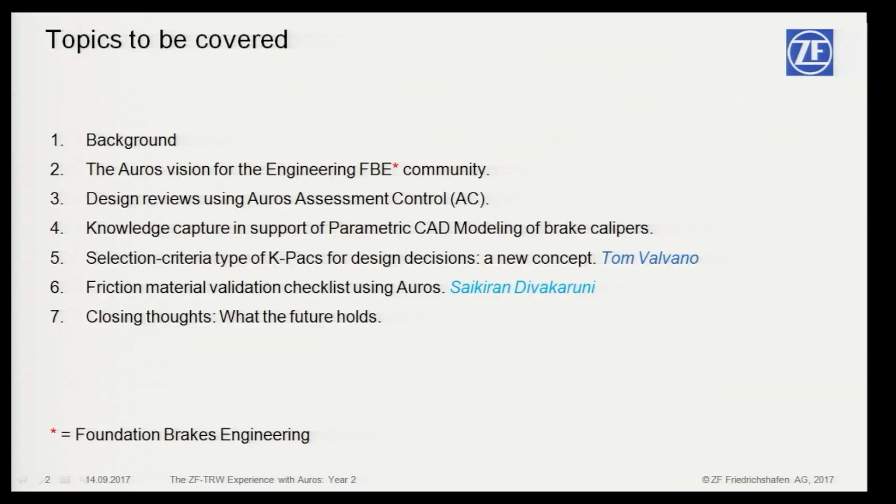A little bit of what we're going to cover today: we're going to give a quick background on what our company is, what Auros is in our work, and what our vision is for the Engineering FBE. We're going to see these 3 letters a lot — it means Foundation Brakes Engineering, which we're representing here.

Chris McCormick is our chief engineer. He's here again this year. He was here last year.

Number 3 will be design reviews in Auros, something I take a lot of pride in. I think we did a really good job over the past year. Number 4 would be knowledge capture using, in support of parametric modeling.

We're going to have 2 other presenters. Tom Valvano is going to show something really similar to what Tim presented in terms of knowledge enhanced decision making — really a decision making use of K-Pacs for the design engineer. There are points in the design where somebody needs to know which material to use, which feature to use. Tom is going to go into a little more detail on that.

We have Saikiran from our friction material team, who is going to go through his work in Auros, and we're going to have some closing remarks.

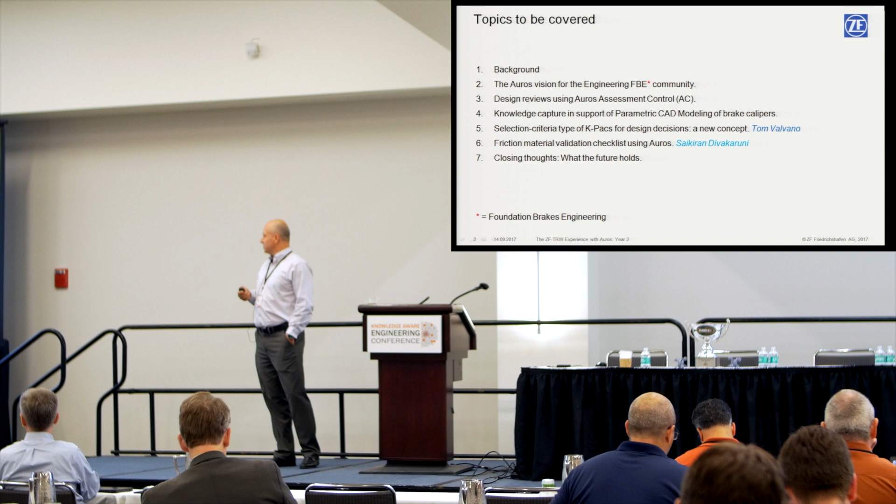First of all, I'd like to go through this slide quickly. I know Tom made fun of me for putting this in, but I wanted to find something interesting about the word knowledge, trying to find some etymology on it. Basically, it can be broken down into know and ledge. Know is more like know, perceive, recognize.

I really like the fact that it's opposed to opinion — it's something like it lacks opinion, it's really a fact. And the 'ledge' part is just action. So it's fair to say it's the process to seek truth.

We're throwing around another word, knowledge. We went through the information age where people said information is important, data is important. Now we have this other catchphrase that Jeff Moffat wants us to buy into, right Jeff? It's knowledge — knowledge is the most important thing you need to have. So it's important to actually know for your company what is not knowledge.

I think that's what we learned over these years. Some people want to put everything in Auros, but maybe there's already a better place for some of the pieces of data that we have out there. I really like the other word that describes knowledge, which is wisdom.

It's something like what you do, what you have in front of you. So you have a lot of information — let's say you want to bake a cake. You have the information, and with that information you apply your tacit learning, and you make something useful, something delicious in this case.

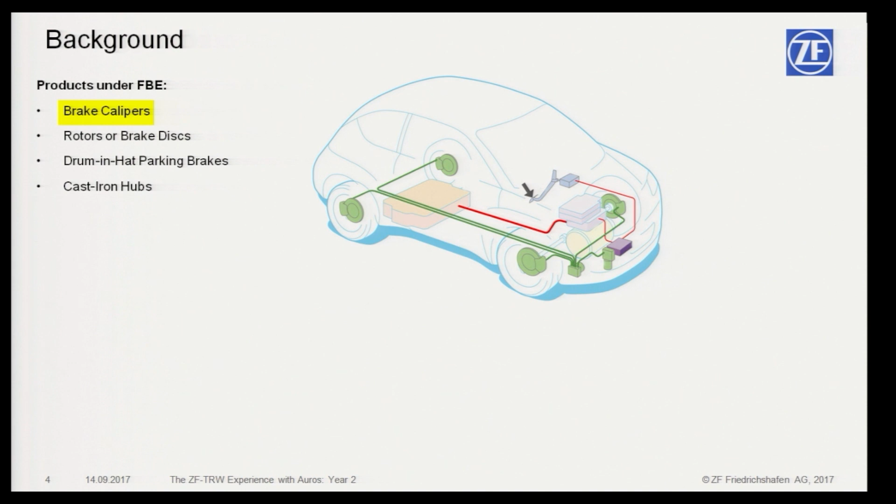Moving on, I just want to show quickly what kind of products we're talking about. We work with brake calipers, rotors or brake discs, parking brakes, and cast iron hubs. What we have here is basically 2 examples of the products we work on, some of the main ones.

One is the conventional caliper. What's shown here is a twin piston design caliper, mostly used on bigger cars and bigger trucks. We also have one example of our electric parking brake, or EPB — a product that's really taking off right now.

So what we have in Auros is mainly related at this point to this type of product. We do have some knowledge in the other 3 products we work on, but mainly what we've worked on for these past years has been on these 2 products, because they represent maybe 90 to 95% of what we do.

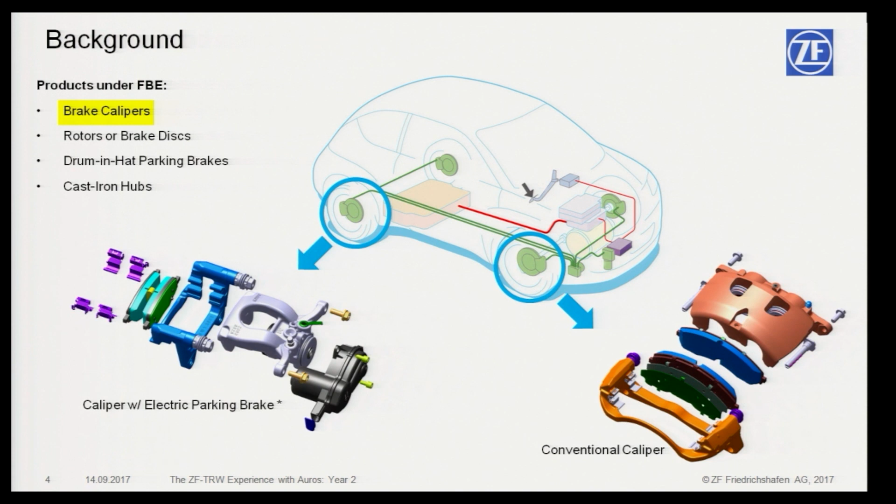So there's a lot of challenges when we're trying to go through knowledge capture applied to brakes. Once we're doing the brake design, one of the first things that we look at is to minimize brake drag. I don't intend this to be heavily an engineering discussion, but I just want to point out some of the challenges that we have in terms of knowledge capture. Brake drag is important to reduce or eliminate because it directly relates to fuel economy in your car.

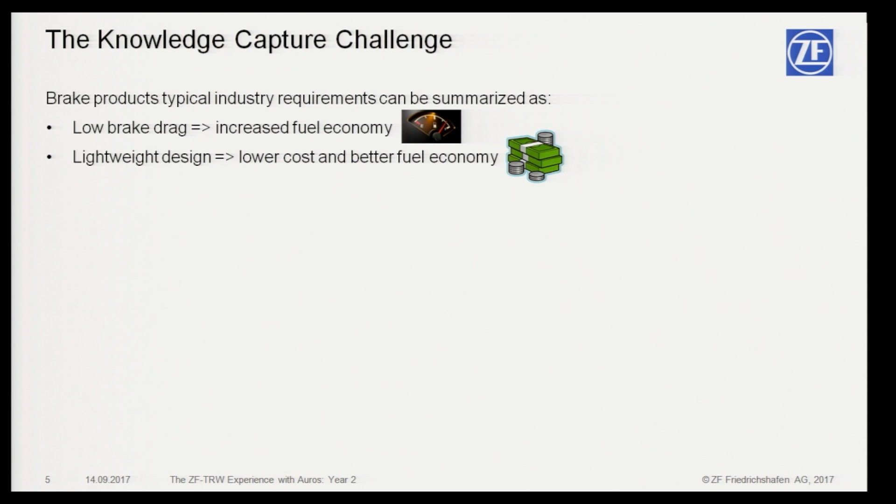The next one will be lightweight design. So we're trying to achieve the customer requirements at a lower cost and also with a reduced mass. Only enough mass, because that also translates to fuel economy in the car.

And we need to make sure things are not going to break, especially when it comes to brakes, right? So we need to make sure it's reliable and it has proper safety requirements met. And it has adequate stiffness. This is related to the pedal feel. Every time you're pressing your brake pedal, you don't want to put your foot all the way to the floor. You want to make sure you have responsive brakes.

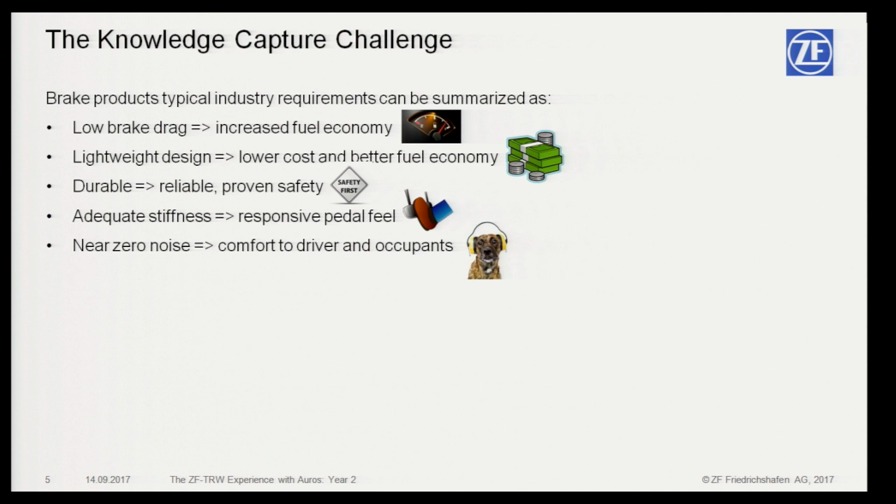And finally, we need to be near zero noise. I know we hear in movies a lot when the cars are braking, you hear that squeal. It's very characteristic. People don't like that. I mean, maybe they like it in movies, but it doesn't work well in real life. So we want to work to minimize that, to bring comfort to the driver and to the occupants, or to the dogs that are in the car.

So a good brake design is when everything is met on time and within a competitive cost. The real key for success here is when we accumulate knowledge of decades of engineers doing studies on their own, testing, calculations, and they come up with good solutions for all of those attributes. Obviously, in our test plan, we have a lot more than this, but I was just trying to summarize the main topics here. So what is key is to make sure we collect that knowledge in a structured way.

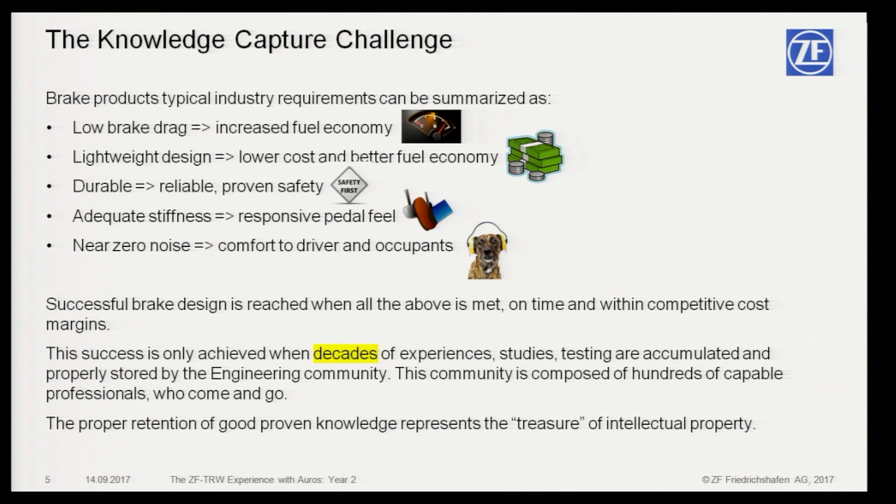So people come and go. That's another challenge that we have. Like I think Tim mentioned, we have good people, but oftentimes they have to move on. They have to move on with their careers or retire sometimes. So the main challenge here, or the treasure of intellectual property, is how to collect that information and apply it to everybody else. So if people can close that gap on the chart that Tim presented there, we can really tap into the experience of others.

And we experienced that firsthand this year, as you guys are going to see in our organization, when we're doing assessments for actual projects. That's when we saw that the standards that we use to design brakes are really, I shouldn't say not great, but they are really not up to speed to some of the things that all of the customers are using. So it allowed us to refine the knowledge, correct that knowledge, update it a lot more.

So last year, we trained most of our people in Auros. We had about 5 awareness sessions where about 80% of the people got into the training. Chris might remember that because I used a lot the character of the angry chief engineer on some of the illustrations for that training, to illustrate recurring errors and stuff. So don't get angry at me, Chris, please.

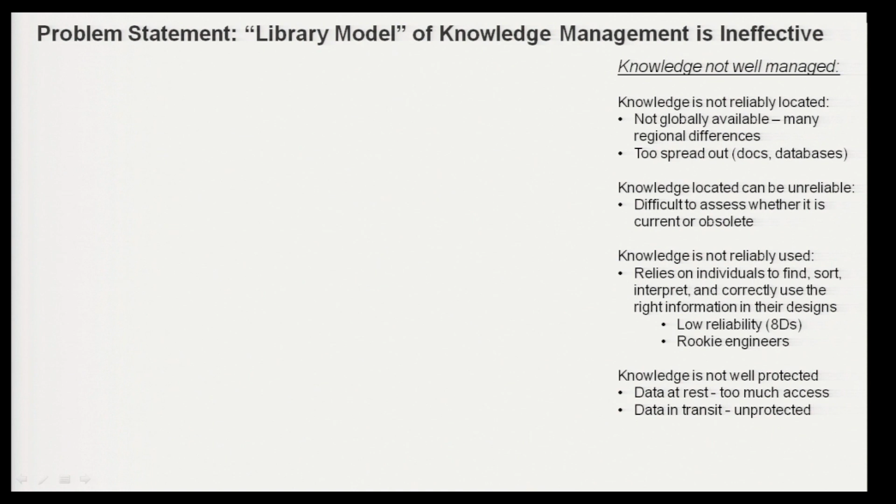So I don't think people are using it actively. The idea was great, and the information in those books is probably very good, but it's a perfect illustration of why a library model doesn't work. Maybe we can repurpose it now to have a new cafeteria or something.

So this is typically what it is - we have a product development process with several gates to go through, and we're expecting people to go to that library and search for information. There's a lot of problems with this. As Jeff mentioned yesterday, it's not efficient, and people have to spend a lot of time going through it. A lot of people don't even go look for information, so there's a lot of issues with that.

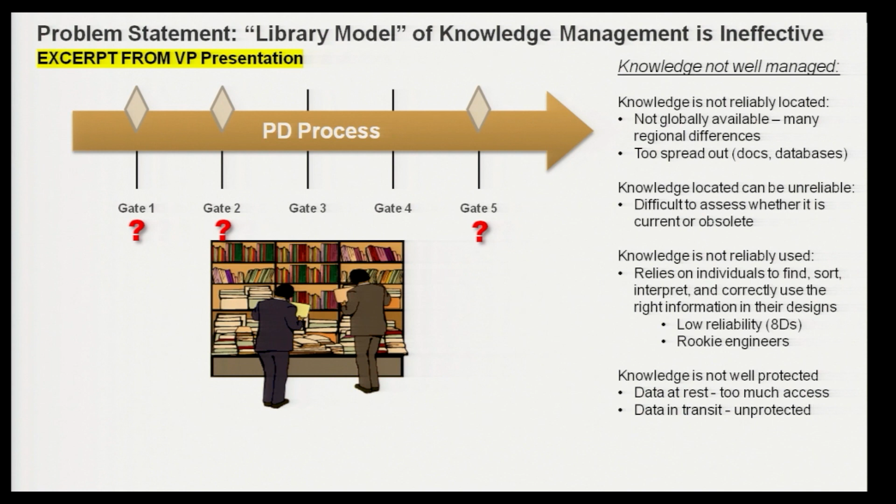So what Auros brings is a new way of doing things - combining all that information in terms of K-Pacs and assessments. We have a structured way to capture knowledge, and a structured way to deploy the knowledge on demand. We're going to see here some expressions of knowledge on demand - that is exactly what the previous presentation is all about.

It's knowledge in the flow of work, or KIT-F - maybe we can call it that, I'm just trying to create a new acronym here. So this is exactly what Auros is going to bring to our company.

So in terms of K-Pacs and assessment controls to structure this, I did a comparison between the conventional approach and the Auros approach.

The first question when you find a nugget of knowledge is: where is it? Sometimes the knowledge is very difficult to find, or not reliably located. Oh, I have it on this email, on the network drive, on my hard drive. It's really difficult to find, it's not globally available. With Auros, we have an easy and reliable location for this type of information.

The second question is, is it reliable? You find an email with a PowerPoint or a spec, but I don't know if it's the latest one, if it's being revised, or maybe somebody will say, oh no, I don't like that spec, I have a better one. So you're really unsure how to proceed in your design.

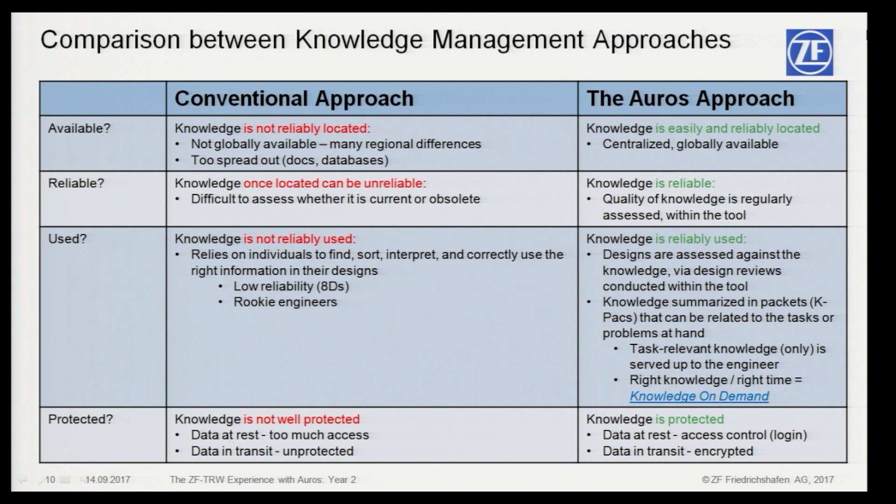The last question is, is it protected? For the conventional approach, the answer is straightforward - we really don't know where emails go once sent out. With Auros, we have the ability to protect information in two ways: access control through login information, and encryption of data in transit. So we have two levels of protection.

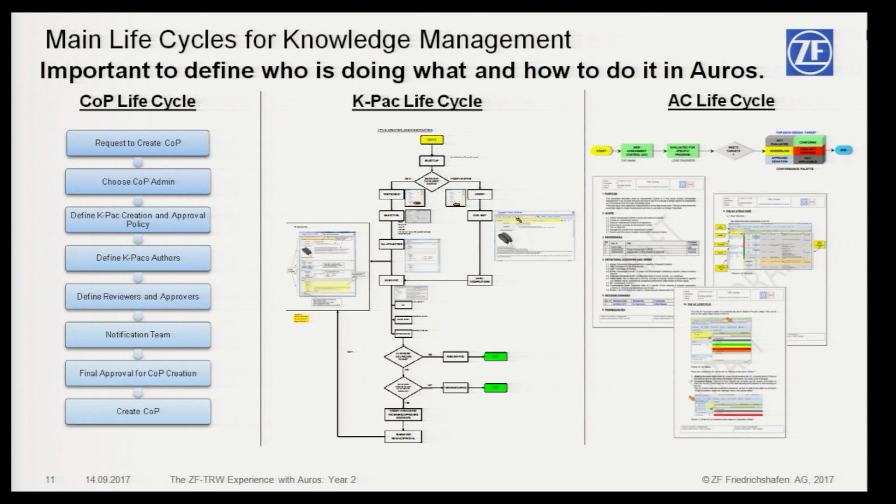Here are the main life cycles for knowledge management. I don't want to go through this in too much detail, but there are really three areas that people are looking at in terms of process in the system: the community of practice, the K-Pac creation and approval process, and the assessment.

The one thing we need to define a lot better now is to ask ourselves who's going to create, maintain, and approve every single piece of these three processes. That needs to be well defined, and we're still working on it, trying to get global agreement - it's really important.

We can have K-Pacs created but not being useful, or even worse, the information there is wrong. So we need to make sure all these K-Pacs and assessments are done, processed by the proper people, with a formal approval process for this stuff.

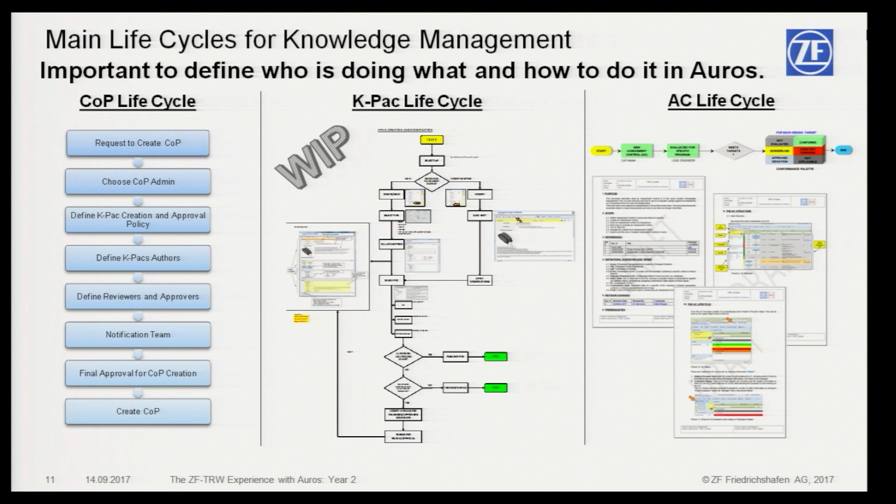In terms of design reviews, I have a couple of slides to illustrate what we're doing here. Why do we do design reviews? Because it's part of our development process - we need to make sure designs going out there meet the latest guidelines so we don't have mistakes happening.

Also, it enables design teams to bring attention to problems with the design, drawing management attention to specific applications. Let's say I have a caliper design but I'm not able to meet a specific requirement because of a packaging constraint or customer requirement - the design reviews are a tool to flag that as red.

So reds are not bad - some people say their project needs all greens, but reds allow people to focus on the right points, get the work done, and bring it to closure. A project with a lot of reds is not necessarily a bad thing, and it also allows refreshing, refining, and improving the knowledge by using it.

So we have an agreement right now that our design supervisors are going to use it. We're handing this information to them, and it's working right now.

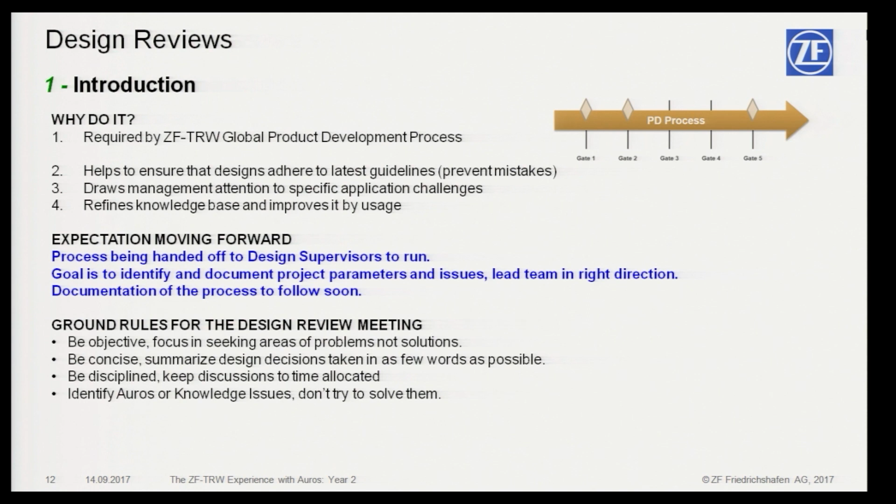We also have some ground rules to keep these design review meetings going. I won't go through much detail, but one thing we need to focus on is that design reviews are meant to identify problems, not to solve them. As engineers, we try to come up with solutions on the fly - why did you put a larger radius here, why did you use a different material there. We allow some of these discussions, but the main focus is to identify issues and identify people and timing to work on them. Otherwise, these meetings can last 4 or 5 hours easily, so we're trying to make them really snappy and productive.

One thing we're trying to define really well for design reviews is the setting. We have people in a room, and we need to make sure everybody knows their roles in the design reviews. First of all, we have a facilitator.

Somebody is going to call the meeting, define the agenda, and make sure the material is brought in for everybody to review, maybe even before the meeting. Most of the time, the facilitator is also going to be the timekeeper. We want to keep these meetings at 60 minutes, and we're able to do that. This person opens and closes the meeting with a short statement and defines what's going to happen next after the meeting.

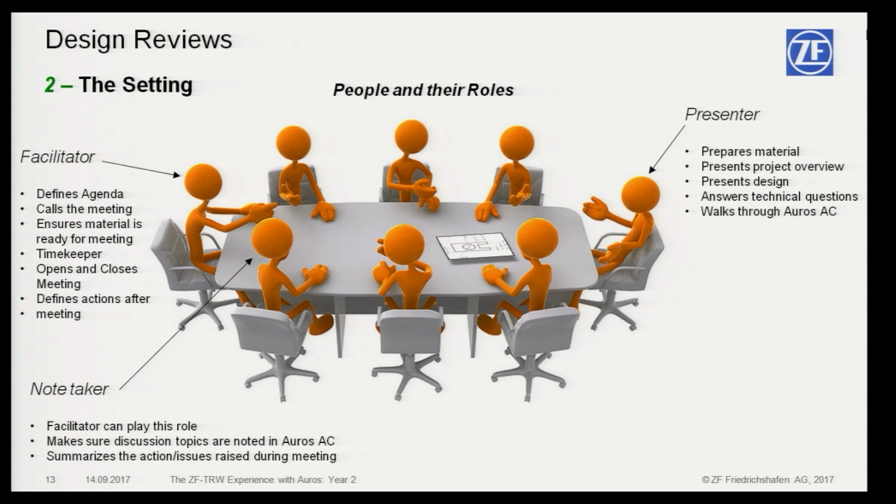We can also define an optional role, a note taker, somebody to take notes along the way. And there's going to be a main presenter, typically the lead designer, who prepares the material, presents the design to the team, and answers technical questions. The Auros assessment will be evaluated by this person, and then there's going to be a portion where the Auros assessment takes place.

There's going to be a knowledge representative, somebody who takes notes on issues with the K-Pacs. We know the K-Pacs are not going to be perfect - we found that out, and this is good. So we actually defined one of the conformance states to be problems with the knowledge, called the KR, or knowledge review. That's where this person takes notes and brings them back to the knowledge team to reinforce the rules there.

And the others are going to be subject matter experts - experienced peers, engineering managers, anybody we feel it's important to have go over this design review.

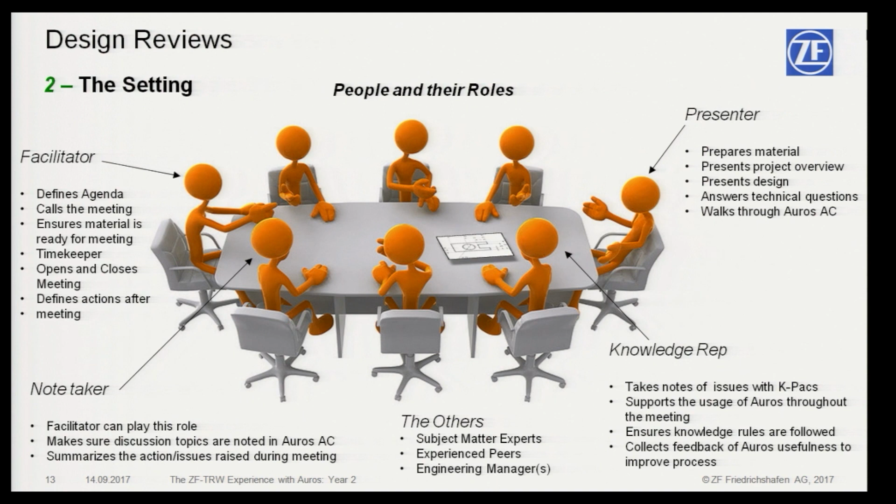So here's a quick overview of how this whole process flows. Typically, we make sure every team has training in the assessment - they really know what buttons to click in the Auros system.

We have meeting one - it's actually an optional meeting where we call the team preparing the material to help them out if they want to evaluate or fill out the assessments during this meeting. We go with them to make sure they know how to do it and that the information is correct. Meeting number 2 is the one I just mentioned - it's the actual design review. We have one hour for it, and we have a structure for the meeting.

At the end, the goal is to have the assessment completed and closed, even if there are red items that get carried to another phase. There needs to be action items identified for each of those issues, and we need to make sure we comply with this.

This is really important because it's related to the look across. I believe Nick from FCA mentioned the importance of the look across. The only way we're going to have quality look across is if these assessments are completed, and completed with correct information and quality. So we also need to make sure the information on the assessments was completed correctly.

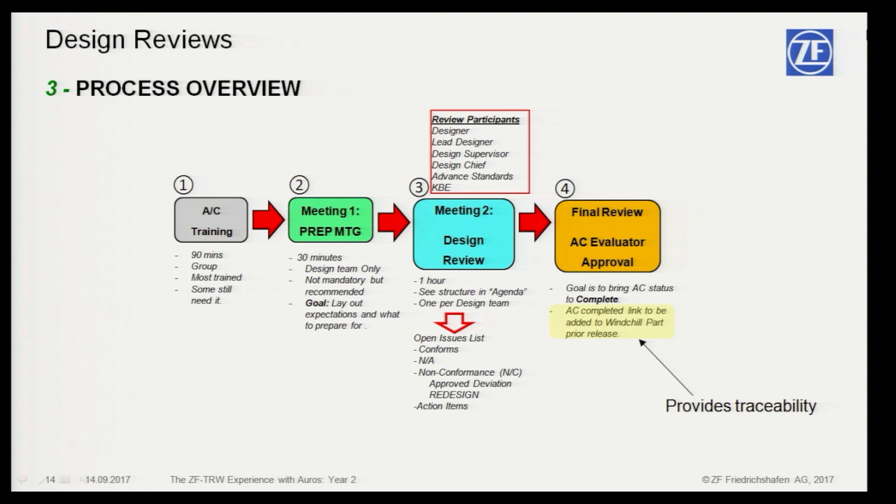So here's just a quick review. The meeting itself has an agenda. I'm not going to go over all the details, but this was really important to keep a pace on the meeting. Every single step has a duration, so people come in, present the program they're working on. There are some main topics we want to see before going to the Auros assessment. And at the end, we want closing remarks to identify who's going to work on what specific issues. So this really helped keep the focus on the meeting.

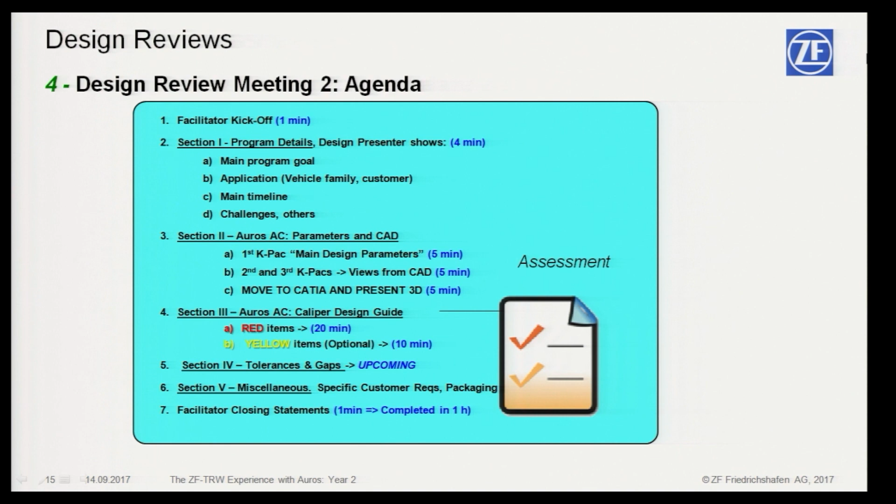So having an agenda seems very basic, but several times we've gone to meetings where nobody has an agenda, nobody knows what's going to be talked about, and we spend one or two hours, and okay, what came out of it? We almost felt like we wasted time there. So this way we really know what to do, and how much time we have for every single step.

The other important aspect I'm going to touch on here, and then Tom is going to present next, is our knowledge capture for CAD parametric modeling. I cannot think of a better tool for design engineers to have knowledge on demand than the CAD model. When the design engineer is working, he's typically working 99% of his time in CAD modeling. So he's defining wall thicknesses, clearances, the shape that is going to fit, the caliper is going to fit under the wheel. Everything goes down to the CAD modeling.

So we need to make sure design engineers are given clear rules and guidelines. Right now we have kind of a separate way, like the library model - there are specs, and then we have our CAD model. We have some parametric modeling with rules embedded, which helps us a lot. But we're really going for the next level, which is using Auros to manage all the design rules and infuse them directly into the CAD model.

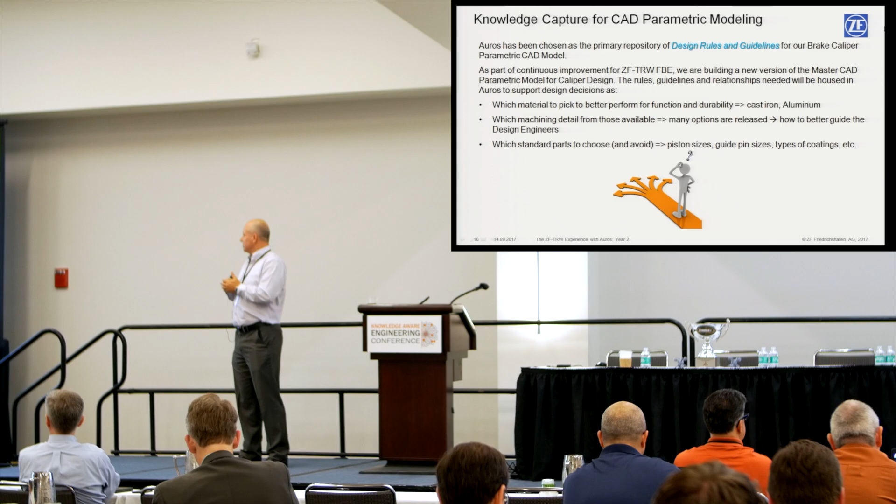A couple things I want to touch on: when somebody is designing a caliper or any kind of system, there's going to be several decisions to be made. For example, which material to pick to better perform the function - cast iron, aluminum, we can have both. So somebody needs to decide which one. So what are the rules? What are the guidelines that we can give our people to make the right decisions?

It's going to depend on the specific needs for the program. There's a decision-making process that, when Tom presents this, was really borrowed from algorithms that financial companies and big companies use to make large scale decisions. Sometimes the decision is not straightforward - we may pick cast iron for durability, but it's going to be heavier. So in engineering we often find ourselves with trade-offs. We make something better, but we make something worse, so there's an optimum point to be achieved. Chris talks about the whack-a-mole game, right - you whack one, the other one jumps up, so the engineer keeps playing around that.

So what we're trying to achieve here is a structured way to make decisions during the design process, and Tom is going to present this in a bit. There are several decisions to be made, and right now we've identified about 40 or 45 important decision points for brake calipers. We have this really well mapped out and this work done. It's a work in progress right now.

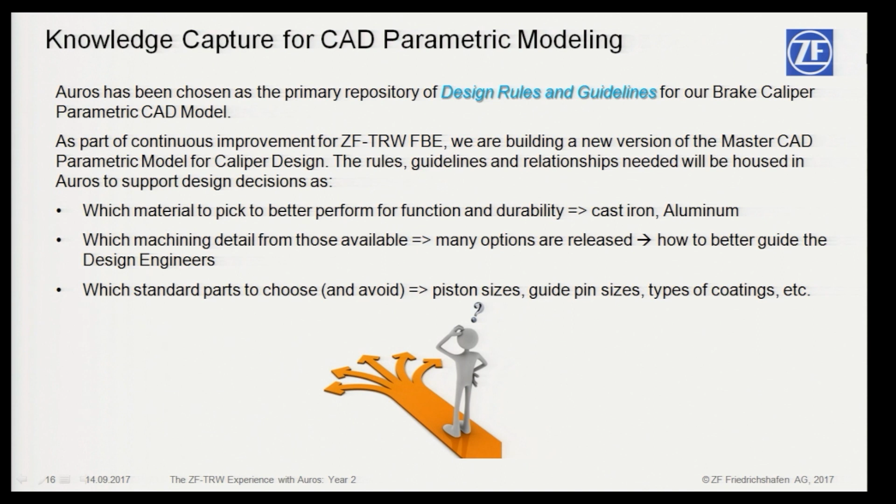So what I have here is just an illustration of how this is going to go. Basically, we're going to have Auros as a centralized place for design guidelines and rules. Another important thing is that parameter definitions are going to be clear there. Oftentimes we cannot use parameters across different systems for simple things because the parameter names are different - sometimes people call it rotor thickness, disc thickness, or disc wall thickness. If you change the name from one system to another, you cannot make the communication between the systems. So we're trying to standardize names and definitions.

The Auros K-Pacs are going to give us the ability to add pictures, to better define what those parameters are. We're going through this work right now, standardizing the terms, the functions, and the component names.

So Auros also has been chosen as a repository for all that standardization. Again, we're providing the design flow, so there's a way to start the design. We identified which features we need to start when you're designing a caliper.

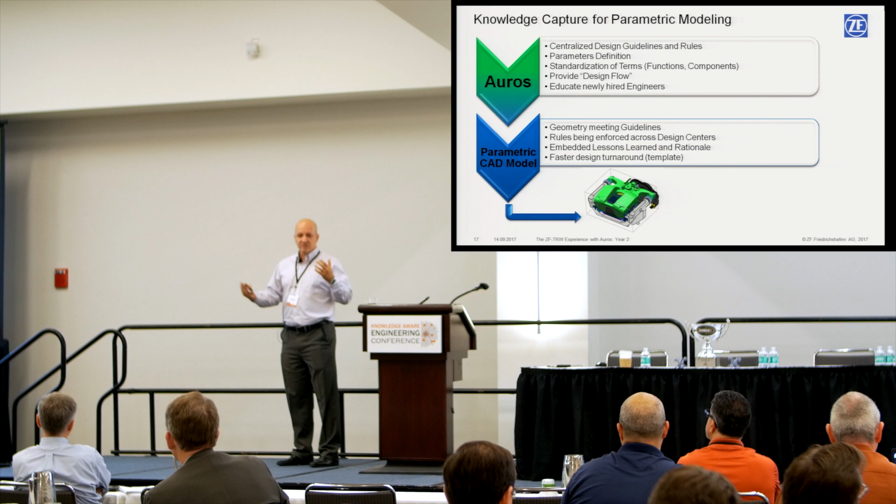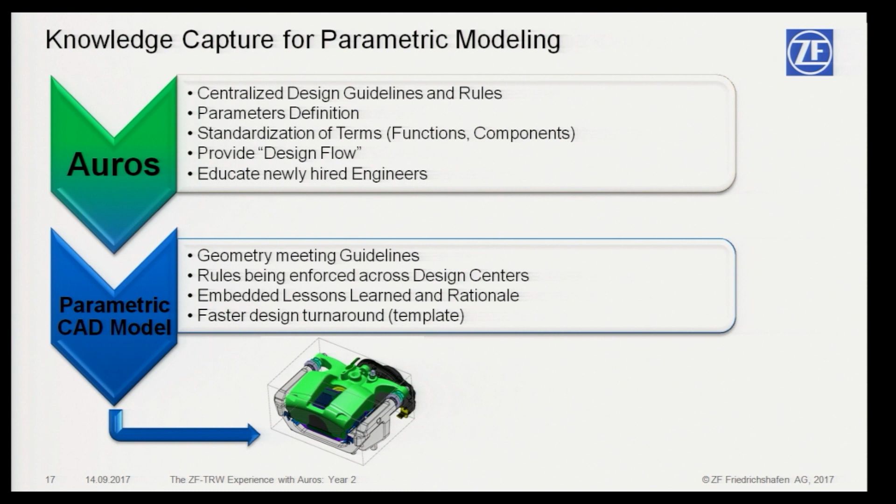And then it also provides an education for new people coming in. With this structured tool, people can really learn about the system. With the parametric model, it's going to give you the geometry that meets those guidelines, and the rules will be enforced for all the design centers. Lessons learned and the how and whys are going to be there, and this is going to enable us to have a faster design turnaround and something that meets the requirements.

So with that, I'm going to ask Tom Valvano to come in, and he's going to present a little bit an example about the selection criteria K-Pac.

Perfect. All right, thank you, Mauro.

So once again, I'm Tom Valvano, and you and I, we make decisions every day. Some of the decisions are very easy, like in Auros, we can go use a value table to look up the size of a bolt. Other decisions are not so direct, and these are actually decisions that we want to address and tackle within Auros. In fact, we created a special K-Pac called Selection Criteria K-Pac, just to house all of those.

And for us, for ZF, it's a new concept in making design-related decisions. So we'll start with the current condition. As a brake supplier, we have specific customer performance requirements that can lead to conflicting product features. High fuel economy, high strength, low cost - they're all very popular parameters, but they can conflict with each other.

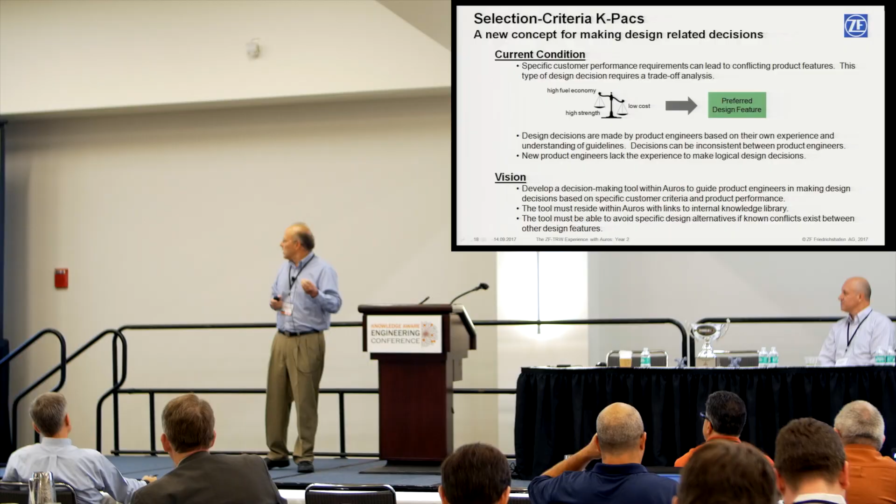The next vision was to have the tool reside all within Auros. To be honest, I was actually starting the structure of this whole tool within Excel with a bunch of hyperlinks going to Auros. And to say it was disconnected is a good example, because I was going between two programs all the time. When there's a lot of work to go between programs, I'm one that wants to look at the easy path, and I start forgetting mostly about doing the Auros part - that's the important information. So our vision was that the whole tool had to reside within Auros.

And finally, the tool must be able to avoid specific design alternatives if there's some known conflicts that occur with other design features. Let me give you an example. Let's say I want to make a decision on a dinner menu for a group of friends, and I know one of those friends has a nut allergy. Well, then logically, I'm going to exclude any menus that have peanuts in it. That's no different than what we want to do with brakes. I have a set of design alternatives, and if I know one has a conflict with a feature, I want to be able to exclude it from the pool.

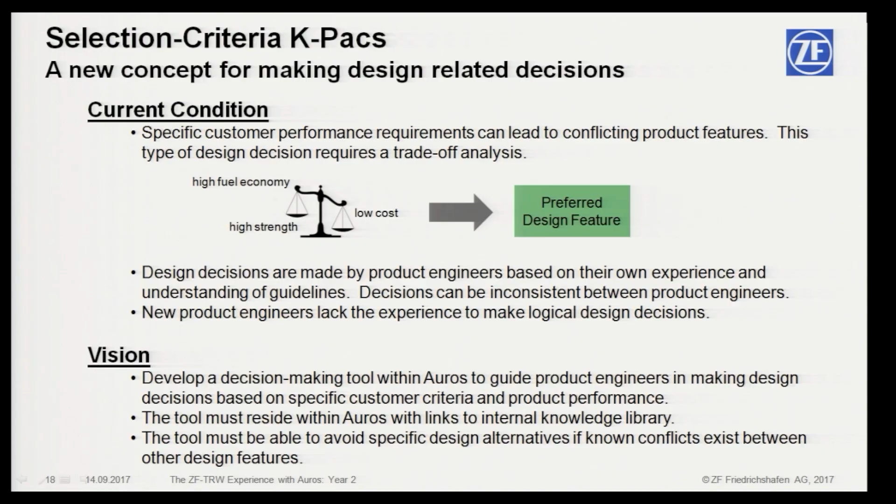That's what we wanted to accomplish in the vision within Auros. So this essentially here is our decision-making process that we're developing within Auros. It's actually made up of 3 blocks. The first block on the left is criteria.

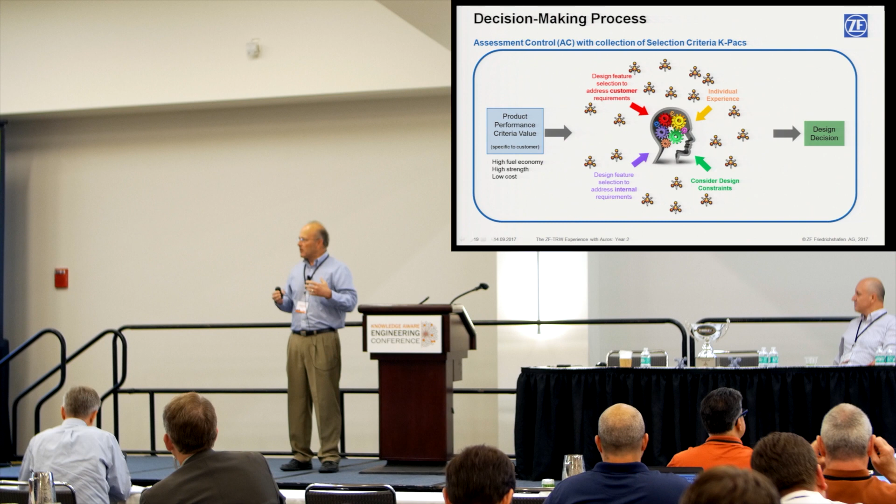All complex decisions require a criteria to base a decision on, to determine which design alternative fits that need. In addition, I put in here high fuel economy, high strength, low cost - that's what I had on the previous slide. But in addition to just defining those criteria, we actually need to now rank the criteria as far as their relative importance. Maybe they're all equally the same, but maybe one or two of them are more important than the other. So there's a ranking and a value applied to that.

The center block is essentially where all our knowledge comes in. That block is essentially all of our design alternatives for this decision. And we know how that design performs. We understand it, we know how it performs relative to the criteria, and all that information is housed within the K-Pacs. We have the design alternatives that we need for customer requirements to meet the internal requirements. The K-Pacs also house all of our individual experiences. And then once again, we talked about the design constraints - that all has to be handled within the K-Pacs.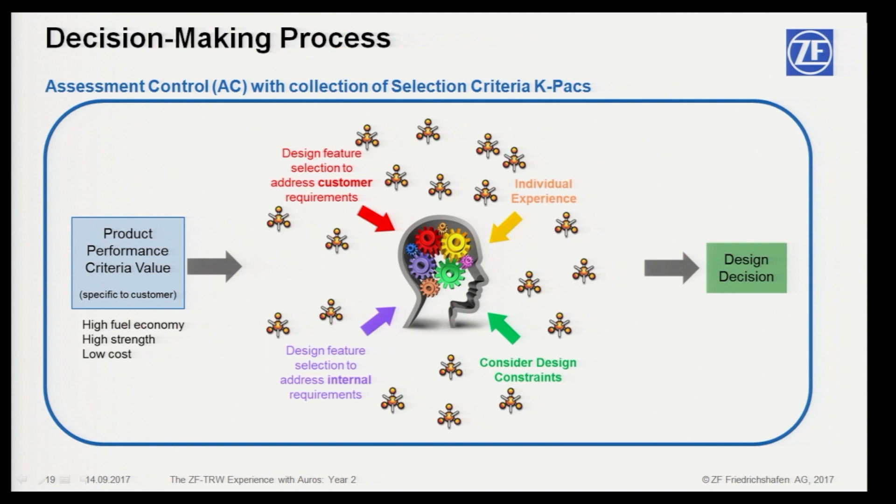And then in the end, the box on the right, we need a design decision that understands the design alternative performance relative to all those criteria. So it's a lot of words. Let me see if I can give an example to show you what we actually are developing. So I have a really important decision to make - which car do I buy?

Now we need to define a value for them. What I chose was 1 to 10, where 1 is the lowest importance, 10 is the highest importance. Now note that what I think is important isn't necessarily what Mauro thinks is important. So it's going to be customer specific. And once again, our result has to be able to accommodate that.

Design alternatives - I have my hybrid car, my Model T, my utility van, and my sports car. Those are my alternatives for this decision. The thumbs up section, that's all our knowledge - that's our understanding of each design alternative relative to that criteria. For instance, if I look at max fuel economy, the hybrid, our knowledge tells us that gets 4 thumbs up, and unfortunately the sports car gets only 1. All of that is housed within K-Pacs and easily accessible.

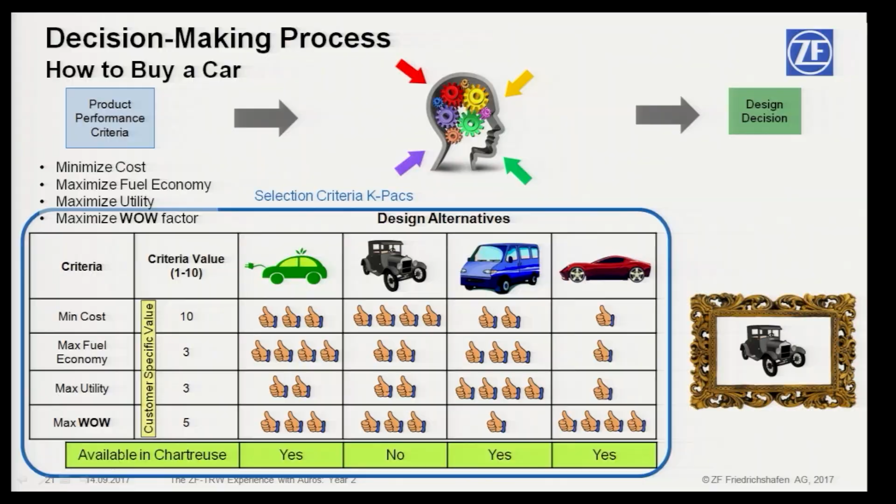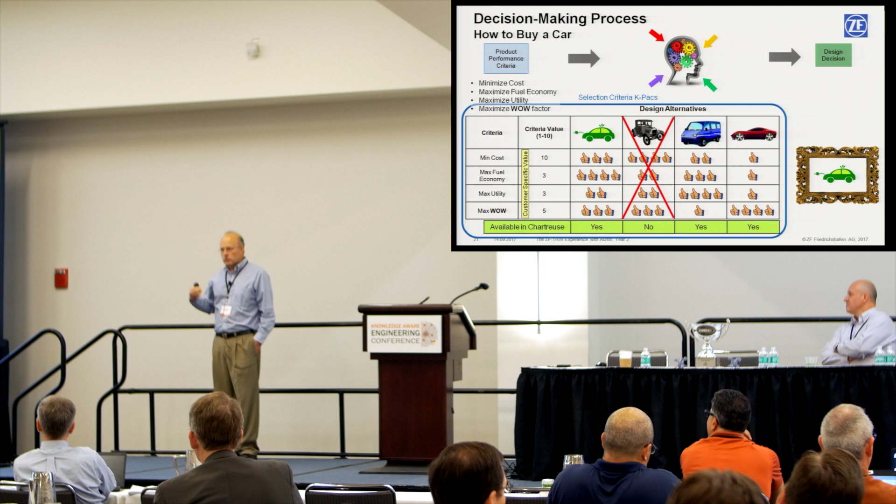So now I've put in a design constraint, and I want to color it chartreuse. For those that don't know what chartreuse is, it's actually a little off that color, but it's a lime green color. Well, we all know that the Model T came in any color you want it, as long as it was black. So I need to be able to exclude that design alternative from our pool. And that is all handled within the K-Pacs, such that my end result, the green car, the hybrid, is now my true design recommendation.

This is how we're passing on the information, the design recommendation, right into the CAD parametric tool to design and develop our part.

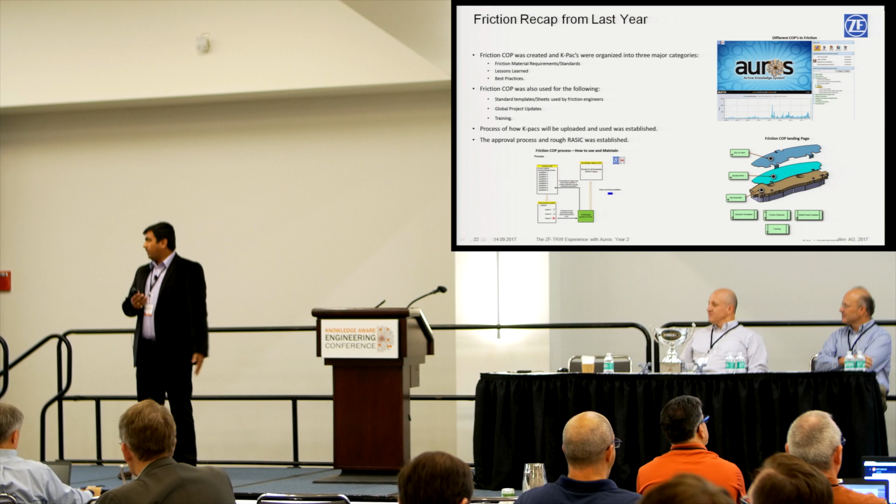We use the system to actually track our global project updates. Our friction engineering team is in Europe, China, Japan, and the US. So for collaboration, it has been a very good platform for us to collaborate easily.

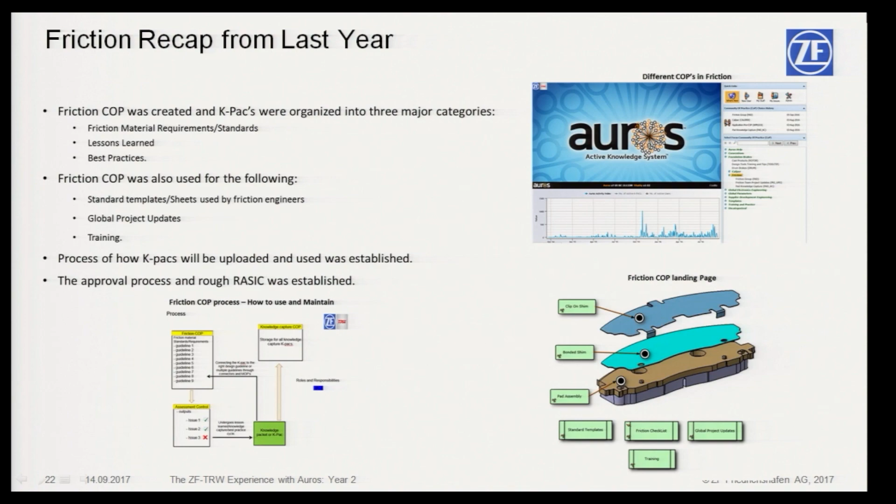We also came up with how we establish the K-Pac and how it flows through the process, and we had a rough RASIC that was established. The reason I say rough RASIC is each location has its own requirements based on customers in Europe and China, so we are still in the process of commonizing, having a single RASIC for the whole friction team globally.

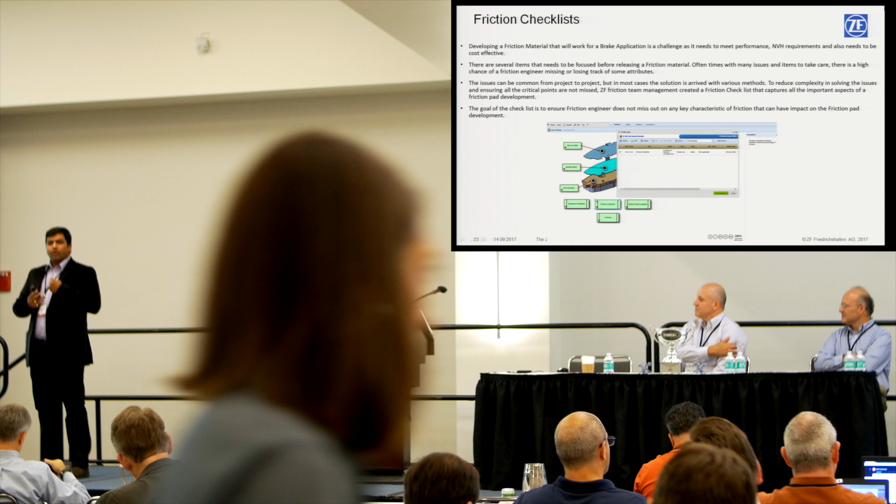Once we established that, as Mauro was stating, there are several issues that we face when we are doing brake development. In every issue, like low drag, noise, durability, everywhere you have friction involved. So friction being the last in the food chain, and it's the one that comes in contact with the rotor, it gets beaten the most. So you really need to develop the friction to be very robust, and the process has to be really mature so that you have very few issues.

For that purpose, we thought that we should actually start doing these assessments where we will bring all the friction checklists into the assessments. That way the friction engineers don't miss any important detail.

If you see the day-to-day work of a friction engineer, they have to go through a lot of data from different suppliers - shim data, friction data - and there are a lot of parameters that they need to check in testing, in looking at the physical data, and all this stuff. So there are many chances of them missing one or two single points.

And even when we are doing the reviews, there are many chances that we can miss those. And those small things, if missed, can cost big during production or PV stage. So late last year, what we did was we created this assessment with all the friction checklist.

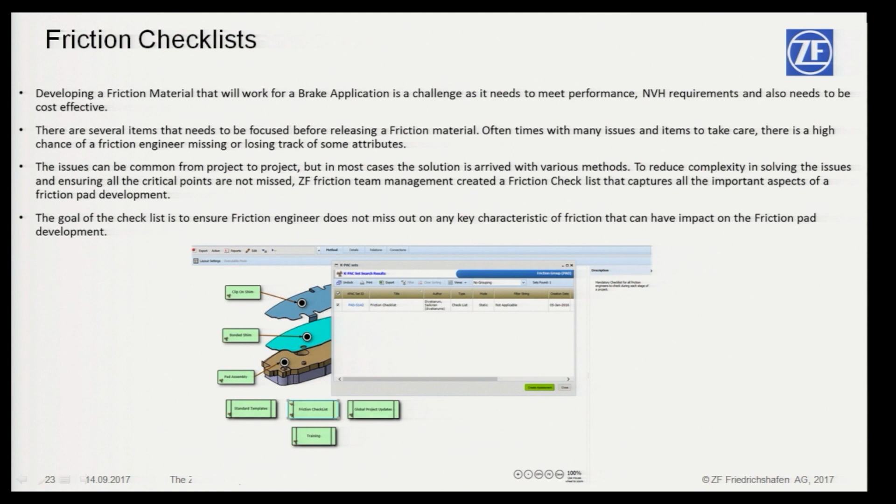And the goal was the whole global friction team should start using it. When we brought this idea, everybody liked it - that, oh yeah, we've got to do this.

So we did a pilot in the North American team, and each friction engineer chose a program that they are working on, and they did the assessment for that.

The majority of people had very good feedback - they like this, it's going to help them. We had some people who thought it's extra work, and some who thought it was neutral. This was the same in our global teams as well, in Europe and China.

Since the majority likes it, and I think our direction is to use this as our knowledge management tool, after this pilot, now we are starting to incorporate it in our regular work.

So this year, our goal is basically to do the checklist on every program during DV, PV, and before PPAP or during the launch. The idea is to have all the checklist items green at the end of the PV stage.

So in DV, there might be some issues that they didn't fix yet, or they're still working to fix it, but when we come to the PV stage, we should have everything green.

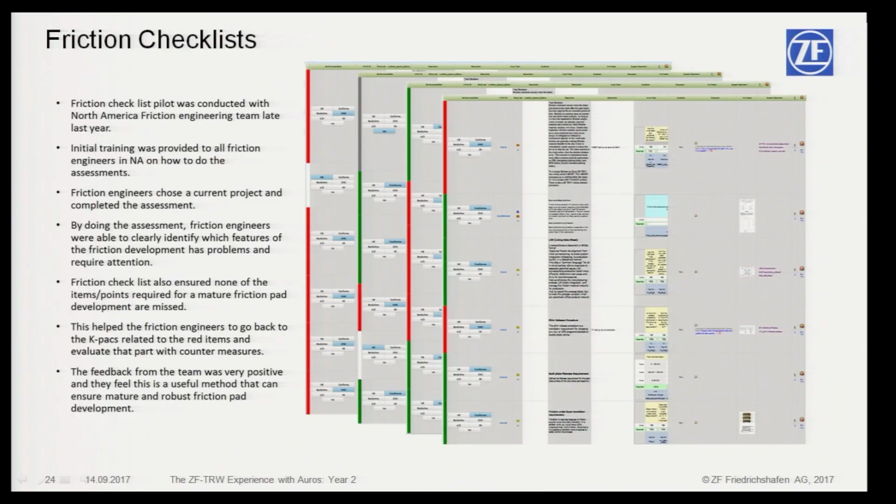And then you can see in this assessment, we are able to add comments, we are able to add documents to that particular friction requirement. So for any issues, we note how they solved it - did they use an existing K-pac or existing knowledge packet to solve this issue, or did they come up with new knowledge or a new way to solve it?

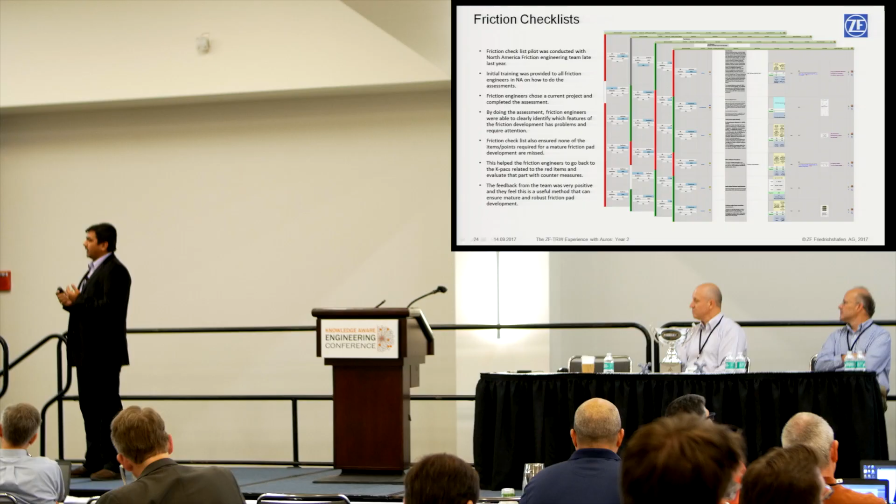Everything can be documented. Once we think, okay, we came up with a new method to solve this issue, that will go into a new knowledge packet, and that will be tied to the respective design requirement. We want to see how it's improving our development process so that we are making fewer mistakes, or we are able to capture the mistakes early in the program.

Another main thing is the friction engineers, when they are in meetings, get asked a lot of questions about what friction material to use for this program, or what do you think about this. Many times they have to answer from memory, or they have to go back and check their documents in the database, and it takes some time.

So what we anticipate with this checklist is basically, you can use the same friction material for different programs, and you can have different issues. It can work on one program, but on another program you can have another issue.

But when you're doing these assessments, say we use friction material 1 during CV, DV, PV stage for project 1, project 2, project 3, then this assessment can capture a common issue, like stiction. Stiction is nothing but pads sticking to your rotor when you park it for two weeks, maybe in an airport or something. That can be a common issue on all three programs.

Then the friction engineer is well informed that, okay, if I'm choosing this material, this is the issue I'm going to face. And those assessments will show how it was solved. The other thing it also helps is, like, how it was solved.

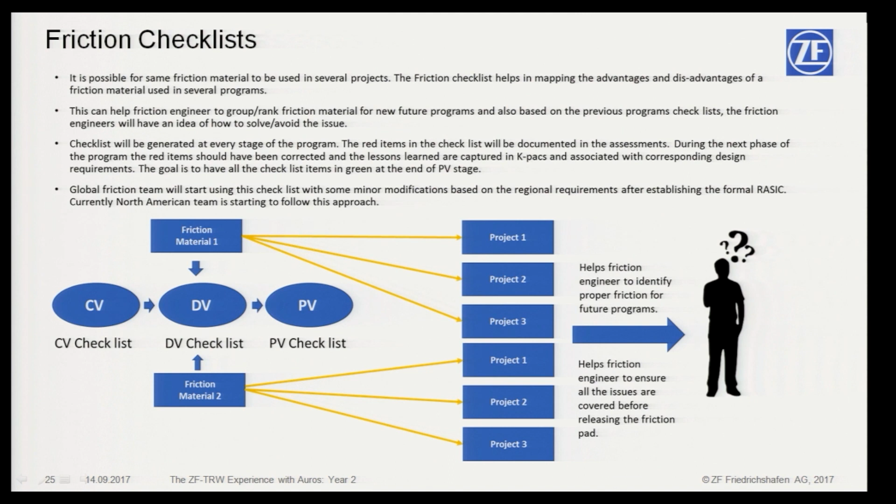So for example, they solved the stiction issue, and then they're going to the next program. Maybe they still want to use this friction material, but because of some noise issue or something they're forced to use something else, so what are the alternatives they need? They can search using just a friction material keyword, and they can actually have a well-informed answer for the customer when they are being asked.

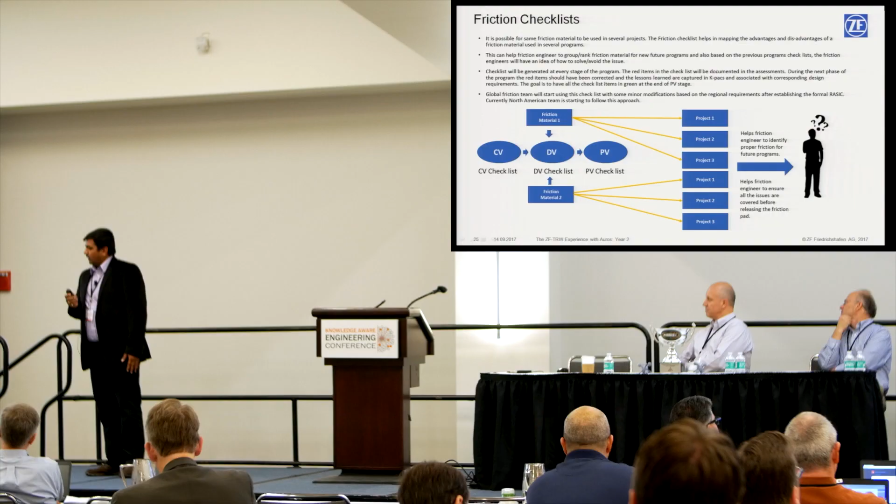So that's our goal, and I think next year we hope to have enough assessments done on all the programs, and we want to see how it has improved the efficiency of the team, and then we want to roll it over to global as well. So that's about the friction stuff we did this year.

So for closing thoughts, I'll give it back to Mauro.

Okay, I just have 38 more slides to go through before lunch. I'm sure you guys are not hungry. And I just want to close with a couple of things.

We still have a lot of work to do, a lot of process to go through and work instructions to write. I really like the first point from this morning, that the goal here is to learn how to market this product, this idea, within their company.

I want to say that the biggest thing is persistence and patience. We are where we are because we had to try different things. You have to persist, you have to always be willing to change your approach. If one approach doesn't work, try a different approach, but never give up. It's not easy to introduce a new concept, a new system within a company, but the main thing is persistence there. So these are the lessons learned from applying this.

The future looks bright from our end. We have strong support from upper management for global implementation. As a matter of fact, Auros was just selected as one of the main metrics for our projects to be measured against. So every single engineer needs to be shown an assessment complete for its project. This is a great success for us.